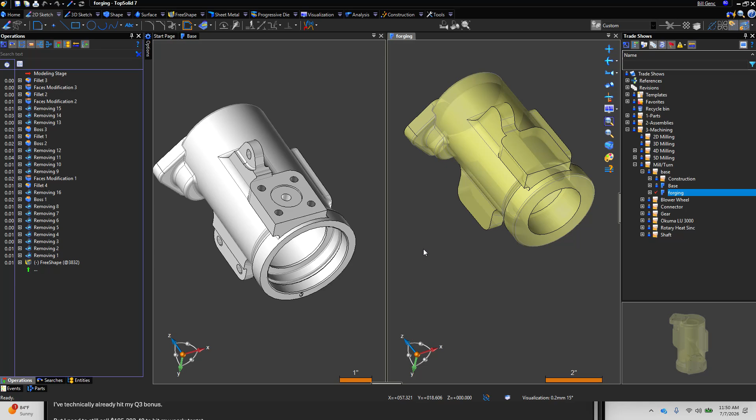So let's get started. I'm going to go ahead and close the forging document. Don't need it. In fact, I don't even need the base document, but we'll leave it open for now. So I'm going to come in here and create... actually I'm going to do it this way, sorry.

I'm going to go to the base part file here, right click, and send this to a machine part setup document. If you recall, a machine part setup document is there to tell TopSolid'Cam what the part to cut is, what the stock condition is, and if you want, what the fixtures are. Once you send this into the MPS file, I'm going to hit the red X to cancel because I don't want to define anything yet.

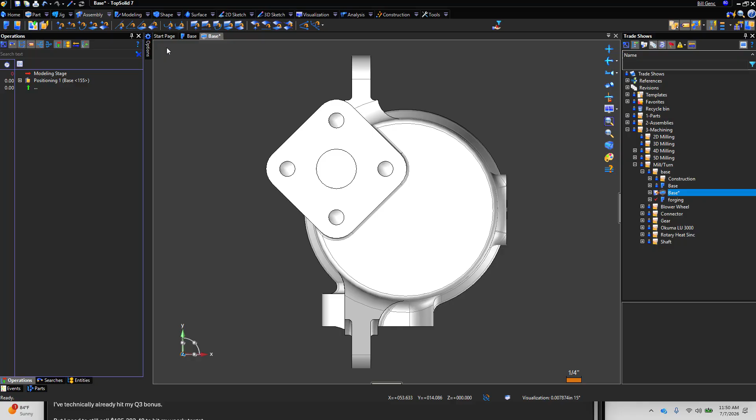Instead, I'm going to go grab my forging document and simply drag and drop it into the design space of the MPS document. New positioning is fine if this question comes up.

And now from here we have to position the part. Now, there are two ways to do the positioning. If whoever designed the forging was nice to you, they used the same main absolute coordinate system or frame as they do in the actual designed part file.

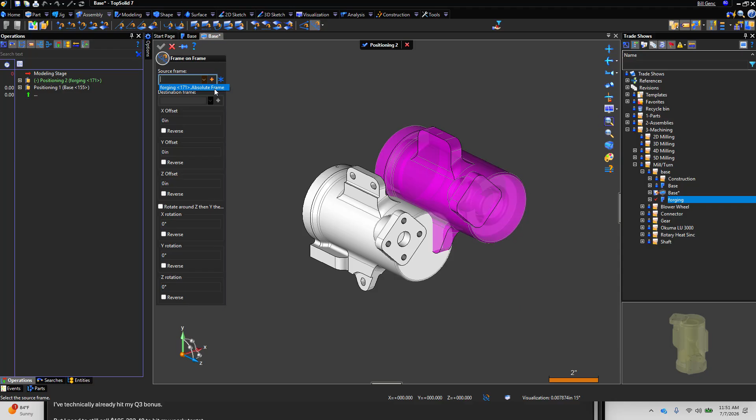If that's the case, you can go straight to frame on frame positioning, go to the dialog box here, click on the drop down menu, and you'll see it has the forging absolute frame, so that's the absolute frame of the forging document. Then I can go to this one and put it to the absolute frame here. And because I'm a nice guy, everything lined up perfectly.

Now, I'm going to delete that and pretend I wasn't a nice guy, right? Or this came in skewed, whatever, it's in a different angle. So if that's the case, in positioning, you can go to constraint and you can just simply add your constraints.

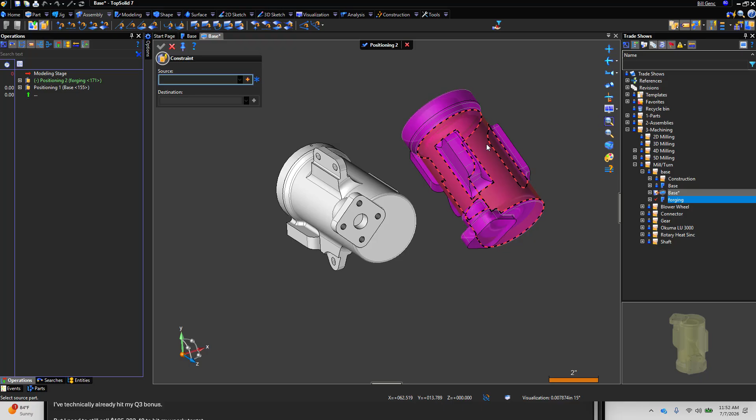For example, I can say I want to take that cylinder to that cylinder. And right off the bat, we're now looking pretty good there. Next, I maybe want to take this face to that face.

That's looking pretty good. And then from here, I'm just looking for features that maybe are the same. I'm going to go that face to that face. Model turns blue, which means it's fully defined, fully positioned. I can validate the positioning.

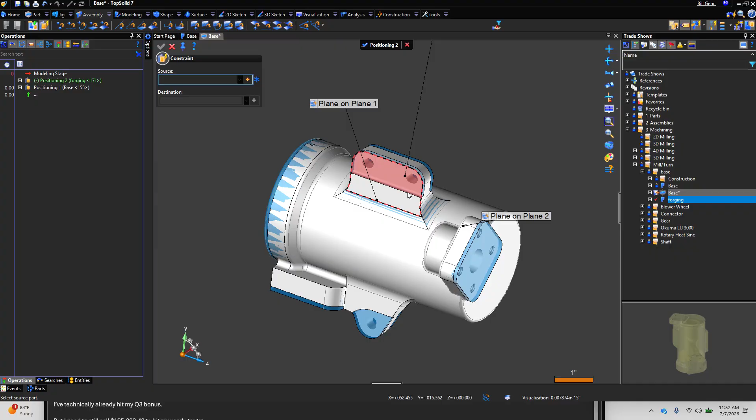So whether you use absolute frame or just regular positioning, that's up to you. But now we have the models combined the way they need to be.

The next step is to go to the part menu and go to the edit NC part command. Could be there. You can right click in space, choose edit NC part, whatever makes you happy.

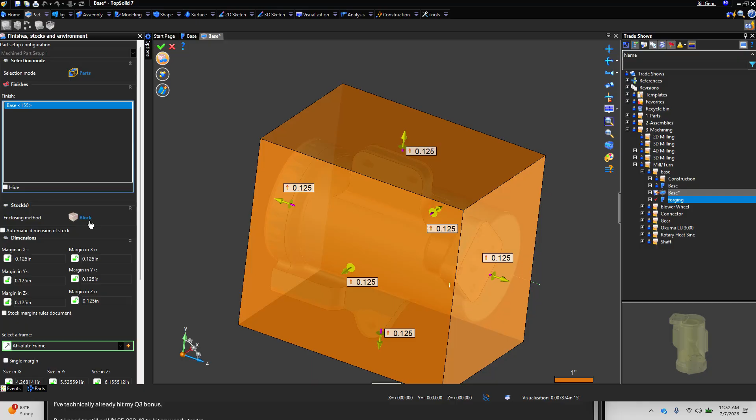Go here to the first option for finishes, stocks and environment, and we're going to switch from block to user stock. I'm going to click in the user stock area here, and I'm going to go select the user stock or the forging. That's it. Validate. That's now going to be considered the stock for this part.

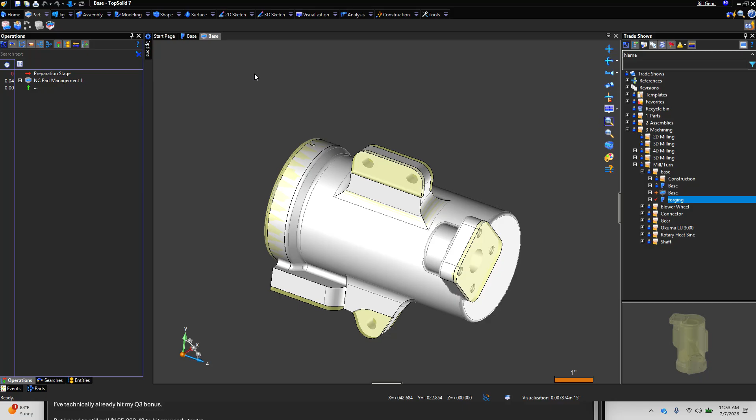From here, you go load this onto a machine like you normally would, and you start creating your machining operations as you normally would. Hope you enjoyed the video. Have a great day.